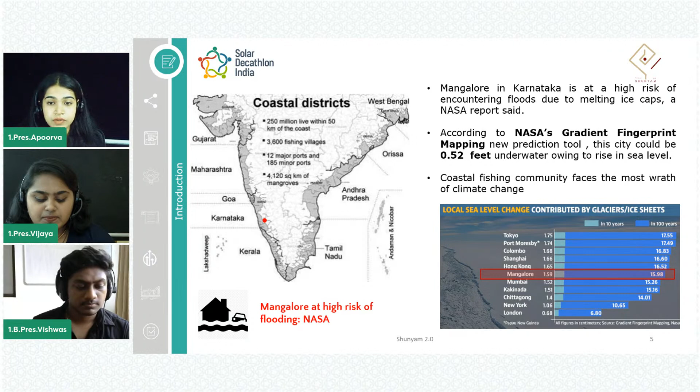Most of India forms a peninsula, which means it is surrounded by water on three sides. Peninsular India comprises the diverse topological and climatic patterns of South India. The peninsula is bounded on the west by the Arabian Sea, on the east by the Bay of Bengal, and on the north by the Vindhya and Satpura ranges. But these coastal cities are endangered owing to climate change. This is further supported by the latest report from NASA, which predicts that cities like Mangalore could be half a feet underwater owing to rise in sea level. The Mogaviras, a fishing community especially, is affected dramatically. Mangalore is a bordering city to Kerala and is prone to flooding very often.

Many flooded houses along the stretch are deserted. People living in this area are now seen often relocating during monsoon season to avoid harsh effects of climate change. As per IPCC reports, the coastal city of Mangalore is expected to face impacts of climate change and rising sea level. Given the challenges, we have considered our site on the coast of Ullal.

The site is home to the indigenous Mogavira community, easily accessible to the public, and has very viable problems which can be addressed by providing a community resilient shelter. Here are some hard numbers for your reference. Nerel is to be developed on 3 acres in the warm, humid climate of Ullal, Mangalore. Our project has a built-up area of 3,500 square meters and can house about 200 people.

The project will be occupied for 24 hours for 6 months, which is monsoon season, and for the remaining 6 months it is expected to be occupied for 12 hours including weekends. We have done an environmental vulnerability assessment for our project and have considered various threats to our site. From the assessment, it was very clear that we need to take utmost care from the sea, floods, and pandemic.

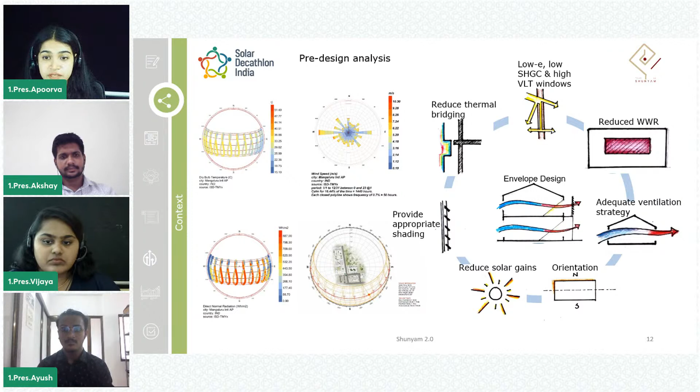So, based on the climatic analysis for the site, Nerel design principles include reduced thermal bridging with use of insulation in roof wall junctions, use of passive house windows, reduced WWR with adequate ventilation strategies, and reduced solar heat gains by appropriate shading strategies and orienting the longer axis of the building facing north south direction while providing appropriate shading. Nerel also follows an integrated design approach to achieve net zero energy.

We considered having a lot of to and fro to reach a consensus in our design. We have defined 8 broad goals for our project, apart from the 10 contests as suggested in the competition brief. The way we have defined these goals is to have a strategy along with the rationale. For example, we have a target EPI of 50 kilowatt hours per meter square per annum for our project, for which the strategy is to reduce the cooling demand by reducing the radiative, conductive, convective heat gain for our building envelope.

Further, the rationale we have is that cooling load accounts for 60% of the overall energy consumption in the building, and addressing the high energy consuming parameter will help to reduce the overall building EPI. To achieve the said goals, Nerel uses specifications like orienting the longer axis facing north and south, providing 30% WWR along with the use of double glazed windows to reduce heat gain. This is further enhanced by having overhangs, roof, and wall insulation.

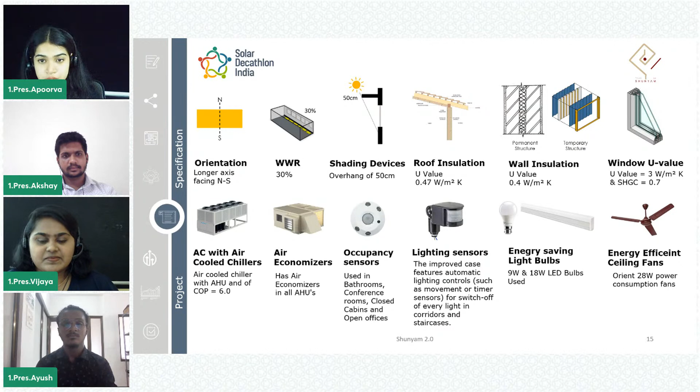Further, to increase energy performance, fixtures like energy efficient fans and light bulbs, and occupancy sensors are used. Indoor air quality is maintained with ACs with air cooled chillers and air handling units. Each air handling unit is equipped with air economizers. Considering the usage of spaces in a community resilient shelter, Nerel has permanent and dynamic temporary zones in the building.

The community kitchen and the dining, dormitory, and school daycare are designed to be temporary structures, while the hospital, the isolation blocks, along with the market and administrative office, are designed as permanent structures through the year, benefiting the entire community. The plan of the CRS is oriented with respect to the climatic analysis.

The site lies partly in CRZ 1 and CRZ 2. To tackle this, the built forms in CRZ 1 are of temporary nature, while the built forms in CRZ 2 are of permanent nature. The plan is kept very simple with access along the site.

The site consists of a market space, office, health cum isolation center, school cum daycare center, dormitory, and a community dining and kitchen. The access to the site is without any barriers and facilitates free movement. The CRZ2 parts of the site consist of a health center, isolation wards, market space, and the office, which will remain functional even during the non-disaster times, while the CRZ1 will be functional when required during the peak periods or during any disasters.

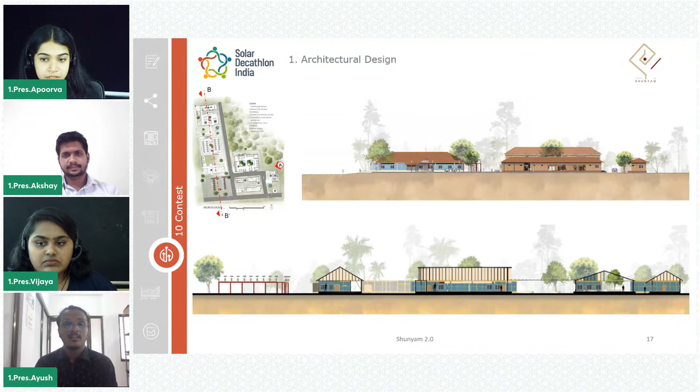The space making in the site has adopted many contextual elements such as cuttays, which are basically talking spaces around a tree designed to facilitate communication and a source of relaxation for the people living there. The temporary structures' walls are an assembly of steel frameworks with insulated JSW corrugated sheets. Since the CRZ1 has loose soil, the foundation was designed to fulfill certain requirements. For this, an innovative idea of using well rings to support the foundation in order to allow the soil to be compacted in place was implemented.

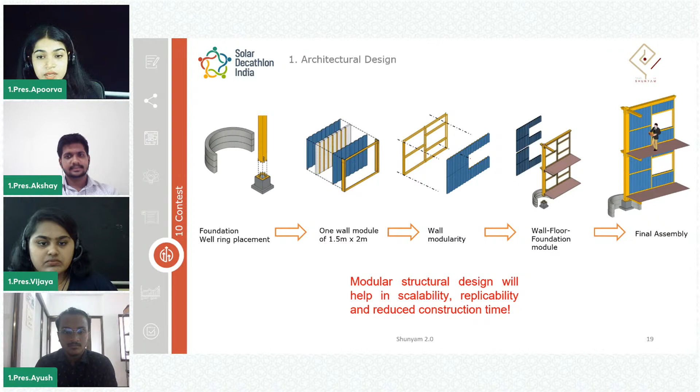On doing several analyses, we came to a conclusion of filling the rings with different layers of aggregates in order to attain structural stability. The assembly is then bolted, erecting the columns and roof in place, and the wall modules could then be fixed by arranging the assembly in not more than 60 hours during the time of any disaster or pandemic. The roof assembly was designed to counter the strong winds and cyclones during the monsoon season. This assembly also helps to prevent the upliftment of the roof from the main structure.

To achieve this, the roof behaves differently in two different cases. That is, case A, when there is not much wind, the flaps will be closed and the water will be directed to gutter A, which is at the lowmost level. While case B is when there is much wind, the flaps will open to let strong winds pass, thus keeping the structure intact while the rainwater will be directed to gutter B, that is the uppermost gutter.

Now coming to the energy performance, Nerel has been able to achieve 67% reduction in EPI as compared to the base case. This is possible by using various energy conservation measures like proper orientation, reduced window to wall ratio, window shading, wall and roof insulation, better window U value and SHGC, efficient HVAC, various sensors, energy efficient lighting, and ceiling fans.

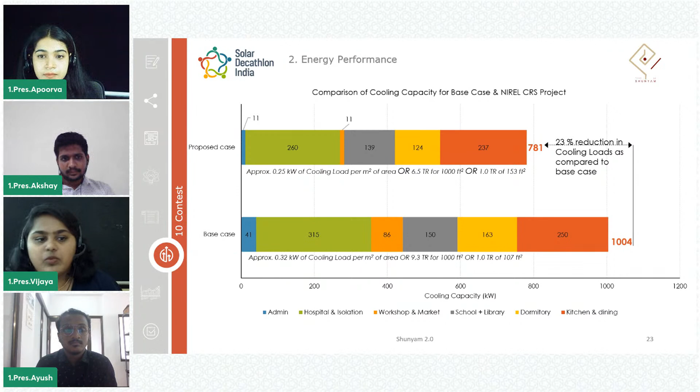While 67% EPI reduction is seen with set strategies and energy efficient solutions, NIREL is further able to reduce 4% EPI with the use of solar panels and an additional 1% reduction using pavement tiles, bringing the overall EPI reduction to 72% as compared to the base case. Research and published data shows that in Mangalore, groundwater has gone 30 to 40 meters below ground. This brings us to our contest number 3, which deals with water performance.

We have deployed various water saving measures like low flow flush, waterless urinals, other efficient plumbing fixtures, rainwater harvesting, using root zone treatment methods, grey water and black water treatment plants, and having an open well. This helps us in 42% reduction in water demands and 100% water demands being met on site.

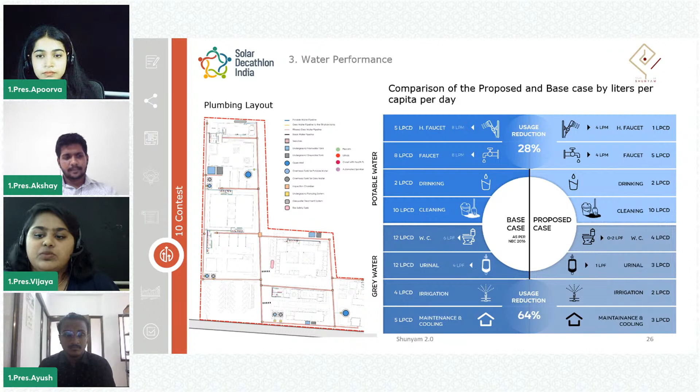Furthermore, the pipelines of water supply pass through trenches all along the site. As water saving measures in Nerel, we use low flush toilets and aerators to regulate water flow. Hence, usage of potable water is reduced by 28% and usage of grey water reduced by 64%. Furthermore, we also have been able to meet the water requirements as per NBC.

Furthermore, Karnataka is experiencing increasing temperature and heat waves year after year. In 2021, parts of Karnataka experienced a peak rise in temperature. Thermal comfort becomes a challenge in design. High performance, net zero buildings would not only minimize energy use but also provide low cost thermal comfort solutions to communities in rural areas. As per the results from Design Builder, we have been able to meet the monthly zone thermal comfort as per ASHRAE 55 simple model for our NIREL CRS project.

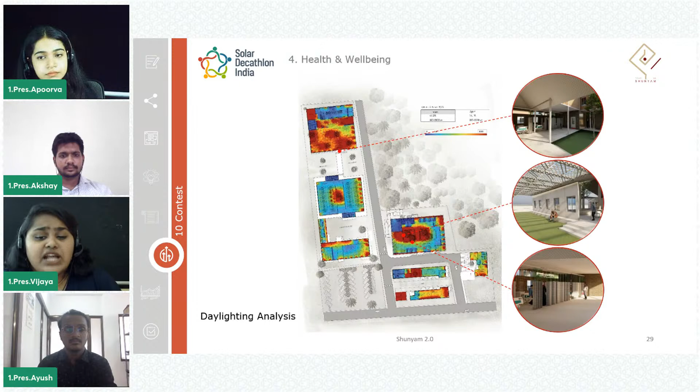Nerel uses a supervisory control and data acquisition system, an integrated system to keep a real-time check on how much energy is consumed on a daily basis, and whenever there is a problem such as leakage or excess use of energy, this system can control and restrict it. This in Mangalore is already implemented in smaller residential units and MESCOM will integrate this on an industrial scale within a year. SCADA has helped us improve the efficiency of the system.

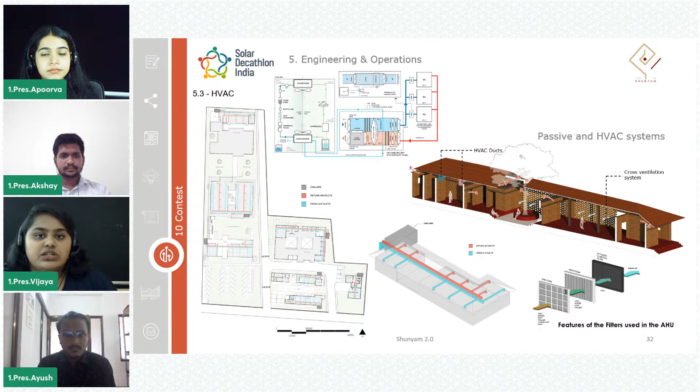Communities in Ullal are highly vulnerable to natural disasters. In that case, the buildings become the first defense for communities. Disaster resilient infrastructure is paramount to protect them from risks to their lives and properties. Food being the important source for survival in any disaster, the site itself will be self sustained enough to meet the food demands of the residents on a small scale with the implementation of square foot gardening.

Along with solar panels, energy generating pavement tiles become a source of renewable energy in Nerel, powered by footsteps. This has successfully helped us reduce our EPI by 1%. Mangalore, being in a warm and humid climate zone, has an average annual relative humidity of about 76%. In Nerel, this has been put to use for generating potable water using atmospheric water generators. Additionally, with the site falling near seashores, it is easier to desalinate salt water with DIY desalination processes.

Now, coming to the most important part, money. We have done our cost calculations and we have been able to achieve our project Nerel at 14% incremental cost as compared to our business as usual case. We also calculated our return on investment, which is at 14.5% and is almost twice the interest rates offered by banks today. We understand that Nerel has 14% higher cost and is difficult to be accepted in a socio-economic setting such as CRS for the Mogavera community.

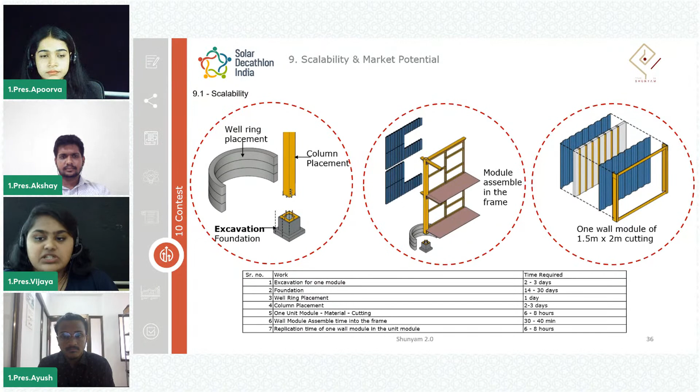The wall and foundation modules being made with ready to use materials makes it significantly easier to replicate the assembly, which contributes to lesser construction time, further increasing the affordability of the project. This also means Nerel can be executed anywhere along the coastline with corresponding conditions. Data shows that about 250 million people live within 50 kilometers of the coast with 3,288 fishing villages, while there is a significant rise in fishing activities in India.

With NIREL's increased scalable aspects, the project can be a solution to keep these numbers up. So, all in all, through our interventions for the NIREL CRS community in the warm and humid climate of Mangalore, we have been able to achieve an EPI of 520, which is a 72% reduction as compared to the base case. We also achieved 100% thermal comfort needs while reducing cooling loads by 23% at the same time. We have 100% water demands met using rainwater harvesting while reducing 42% water consumption.

And we have gone as far as to tell you that we have 66% reduction in embodied carbon energy and 44% reduction in operational carbon energy. Now, you might be thinking that since NIREL has such an amazing design and a reduction in energy and water, it must be costing a bomb. But let me tell you that NIREL is costing only 38,489 rupees per meter square. This is 14% higher cost as compared to the business as usual case.

We justify this cost by having an annual return on investment of 14.5% and the ability to affect about 1,000 people of the Mogavera community. In this section, we would like to bring to everyone's notice that everyone knows the term sustainability. We are also aware of the challenges that we face in achieving sustainability in the built environment. We also know that having sustainability in the built fabric will lead to benefits like high work productivity, better living conditions, improved longevity, and the list goes on.

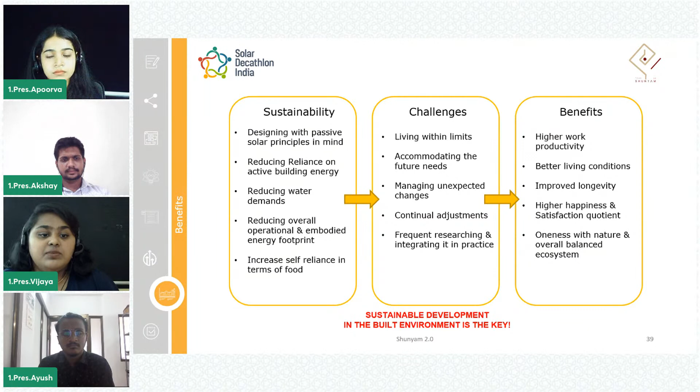Then what is it that is stopping us? We think the answer is lack of realization, as the mask of deception falls off the face of humanity, unveiling the grim realities of human actions in which everyone will be a casualty and no one will be exempt. Yes, although we are many, we are also one. And so, in the final analysis, we can win this war. And as we are toward the end, but the end is only the beginning of calm before the storm. Remember, the choice is solely ours and yours to choose ecosystem over egosystem. We thank you for the opportunity to present our Niral journey.

Ma'am, you're on mute. Thank you, team. You finished well in time. So let's hear the jury comments and take questions from them. Aalok, I'll start with you. You can ask your questions.

Yeah, so thanks, Nivedita, and congratulations, Apoorva, Akshay, Ayush, and Vijaya on making it to the finals. Thank you, sir. I enjoyed reading your report, and I think you have quite a few good things going in your project. One thing that I was not clear about, and I was hoping to see that clarity in the presentation, is: are you hitting a net zero energy target? From the presentation I could gather that you are water neutral, but it is not clear whether you are hitting a net zero energy target. So if you could just help me understand that, it would be helpful.

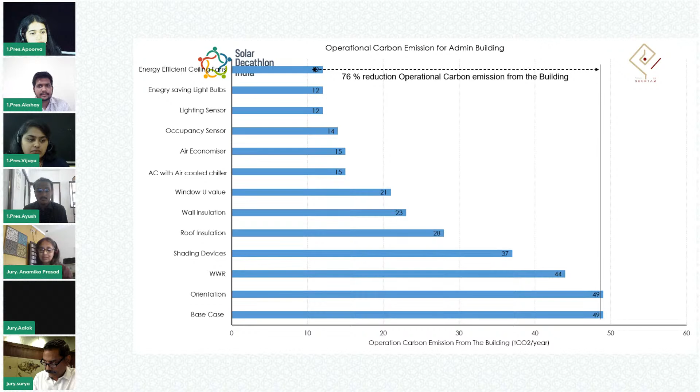You've put in a lot of effort into designing some of your structural systems, and your thought process is well articulated. The well ring foundation, the adaptable flaps on the roof, the modular metal walls. So great job on working that out very well. What else? I was also very happy to see you mention the SCADA system and talk about grid integration. So that is a big plus. Yeah, good job.

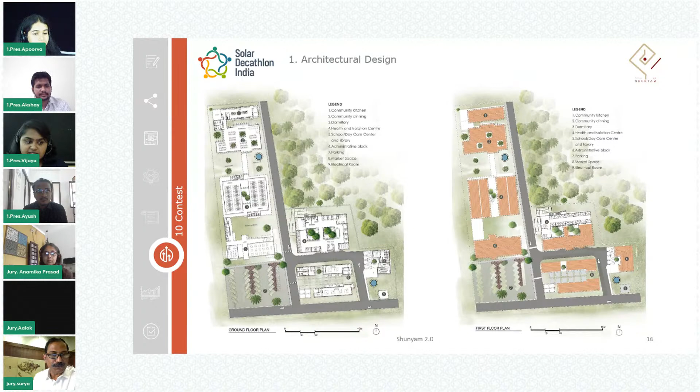If we have a minute more, I just wanted to understand. So if you're spending 38 crores and getting a return on investment of about 14 or 15%, it means that the community center is making 5 crores a year. Is that what your calculation suggests? 38,000 per, it is per square meter per annum. Yeah. Okay.

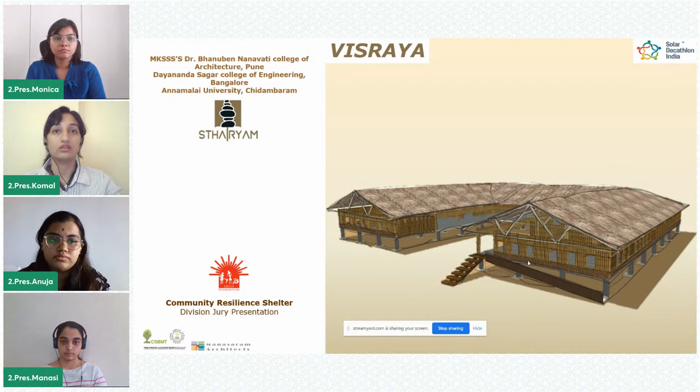Team Sthairyam introduces you to Visraya, meaning shelter for protection. In our case, a community resilient shelter designed for the Mishing community in Lakhimpur district of Assam. To design this, Team Sthairyam comes together, which consists of 12 participants from masters and bachelors. With this diversity in curriculum, our team tries to look at the competition's requirements through various lenses with our faculty lead, Prajakta Kulkarni ma'am.

Our site lies in the northeast part of India. Floods wreak havoc in Assam every year during monsoons. Assam is the land of two mighty rivers, the Brahmaputra and Barak. Each year, these two rivers cause floods in vast areas of Assam. In Lakhimpur, there are around 180 villages, and they all fall under flood-prone area. The nature of the area has rendered the communities disconnected and has left them with limited alternative income sources.

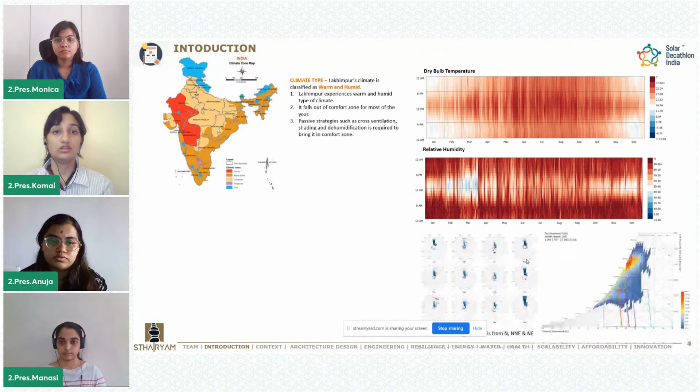Lakhimpur experiences a warm, humid type of climate. According to the chart, it falls out of the comfort zone for most of the year. Dehumidification is required to bring it into the comfort zone. Our site is located on the warm plains with high levels of humidity and heavy rainfall. This brings in water from hills to plains with debris and erodes the soil.

To overcome these challenges, we aim to provide sustainable design to optimize the use of water and energy, make it a resilient and adaptable structure for alternative uses during non-disasters as well, to achieve comfort using efficient solutions, effective reduction in operational and capital costs of the building, to make space safe for women and kids, and provide hygiene and health.

As a team, we intend to follow an integrated design approach, whereby we have set goals for our project in line with our project partner's ideas. The process started with disaster risks in India and management by the state, followed by the site-specific study on the disasters and climate. We then studied local methods and building materials, their stability to withstand disasters in past years, and their architectural styles. After a brief study of the villages, some of the immediate impacts of the flood mapped are on transport, availability of resources, food, sanitation, and shelter.

A preliminary base case analysis with daylight, energy, and ventilation was done for the design options. Comparing the parameters, this design was the feasible one to go ahead with. Project Visraya is designed flexible enough to be used during non-disasters. The site area is 9,500 square meters with a built-up area of 1,810 square meters. The site is flat with an access road on the northern side. The wind flow and the water flow in the site will be prominently from the northeastern direction. Selecting the site location above the main river has helped us reduce the direct water flow in the site.

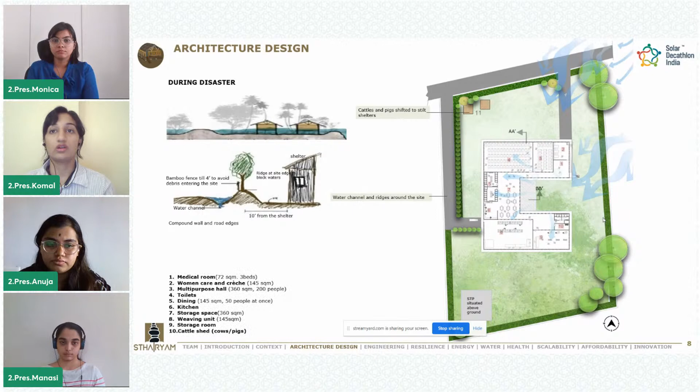So the core guiding principle in our design was to reduce mechanical energy and use natural ventilation while keeping the occupants in a thermally comfortable and safe environment. The shelter is designed to be flexible to accommodate 200 people, and other spaces are converted according to their needs. The cattle are shifted to the stilt shelters. The periphery of the site is designed with water channels and ridges around the site. The STP is located above ground at the southern end of the site to avoid water contamination.

Management during disasters. Preparation for the disaster scenario includes early warnings, providing first aid to the injured and rescued, 24-hour medical rooms to take care of children, women, and disabled, SHG spaces converted to a women's room, preparing medical units during disasters and post disasters, and stocking community kitchens with supplies, moving equipment and baggage to the logistics and weaving room, while laying the mattresses in the multipurpose hall, clearing out spaces for additional occupancy, and lastly, moving the cattle to the shelter.

Here, a building is elevated on concrete stilts to avoid water inflow and enhance greater air movement. Woven bamboo mats made by communities are used in the partition walls. Louvers in the central courtyard provide continual airflow in the humid climate.

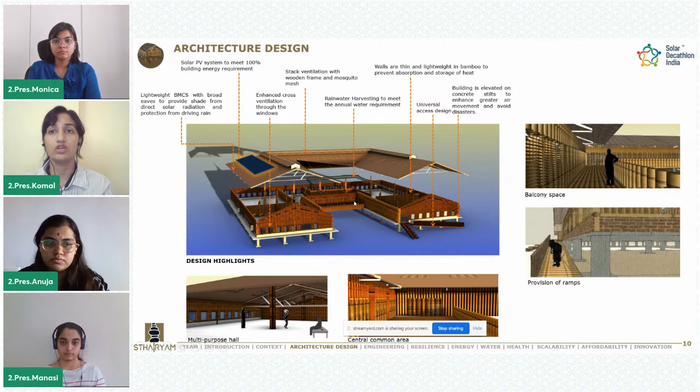Engineering and operations. The material palette includes stone foundation; the substructure is in concrete columns and flooring. Bambusa balcooa can be used for the load-bearing structure, such as walls, partitions, and columns. Simple methods of treating and seasoning bamboo used locally, like water and smoke treatment, are carried out prior to placement, and it is further treated with CCB to reduce the effects of decay and insect infestations. This increases the lifespan of bamboo by up to 20 to 25 years.

Bamboo and cane exterior walls are plastered with mud or cement with fine river sand. The outer edge of the structure is constructed with a hollow adobe block embedded with bamboo columns till sill level, and above sill level it is a bamboo and cane wattle and daub. Interior partitions will be locally available ikra reed panels or bamboo woven mats made by the communities.

The roof consists of wooden trusses, rafters, and purlins of bamboo, with a bamboo corrugated sheet covering with large overhangs. The truss takes up most of the load. The structure is analyzed based on STAAD Pro analysis, and based on the performance of the structure, detailing is taken forward. The depth of the overhang is further calculated using solar azimuth and altitude angles. Using the vertical shading angle, we got up to 1.3 meter depth of the overhang.

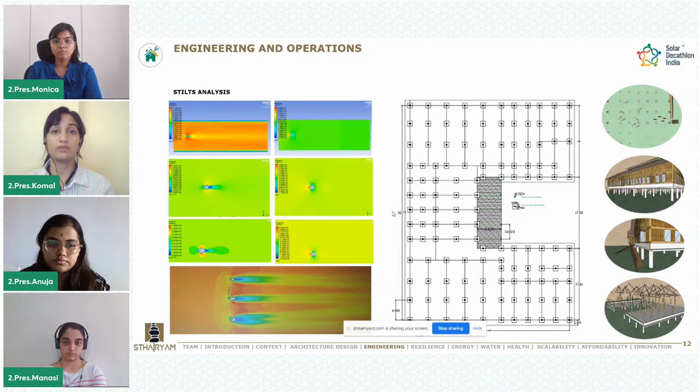Over to you, Monica. Yes, the shelter is connected to the communities within 1000 to 1600 meter radii, providing sufficient supply of goods required for the rescue. Then use of local materials in the construction of the shelter and understanding the local labor. Then creating resilience in nature by creating ridges to prevent damage from debris and the harsh flow of flooding water. Elevating the structure to be resilient during water inflow, relying completely on solar power backups as the shelter is going to be off grid.

So the rain screen detailed windows can withstand the wind, and interior finish materials can dry out and not require replacement. The windows are protected by mosquito mesh, chicken mesh, bamboo grills, window shutters, and large overhangs to protect from the rainwater. Since we have heavy rainfall of about 3,500 annually, the louvers have been designed to keep the water out and allow continual airflow to provide comfort along with the ceiling fan. So the louvers reduce the air velocity by between 25 to 50%.

Resilient metrics. The passive performance of the shelter is 5,745 hours of thermal comfort, that is, 66% of the year it is thermally comfortable. Energy storage: 40 solar batteries with storage capacities of 2 days each are provided. Then for medical support, allocation of medical and paramedical staff as per the FLEWS. Then communication pre and during disasters: the equipment is checked monthly, and maintenance of all equipment is according to the manual. Water sufficiency: drinking water and water use is for a 2-day period.

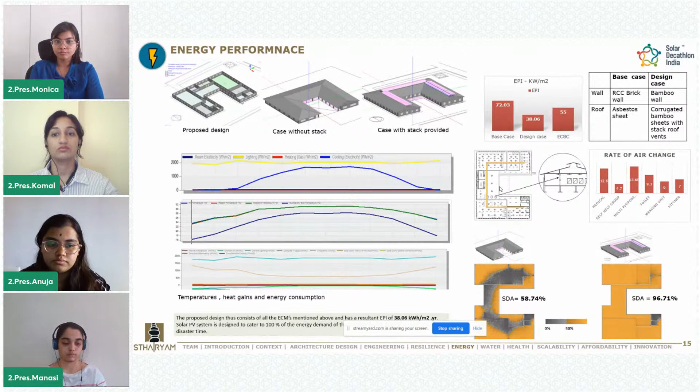Then coming to the solar PV system, the solar system design was optimized by the provision of on-site renewable energy sources, making it completely off-grid, living autonomously without the reliance on the public utility for power. So indicative solar design for the community shelter cum agro-processing center and dairy unit was given by Selco.

The solar design provided a hybrid model and will be connected to the grid for battery charging during non-availability of solar. The batteries and the inverters have to be placed in a well-ventilated space away from any water spillage. Only one machine will be used at a time, so both the machines will not be running simultaneously, and the batteries can be placed in the logistic or the packaging unit. Efficient lighting fixtures are used to reduce the lighting load.

Solar energy products like the rice huller, the solar water pump, and the solar lighting systems are used. Integrated energy centers are installed by Selco, which are essentially solar powered independent service centers in the rural spaces where a combination of energy services such as lighting, mobile charging, charging batteries, etc., can be provided on daily or monthly basis. Over to you, Manasi.

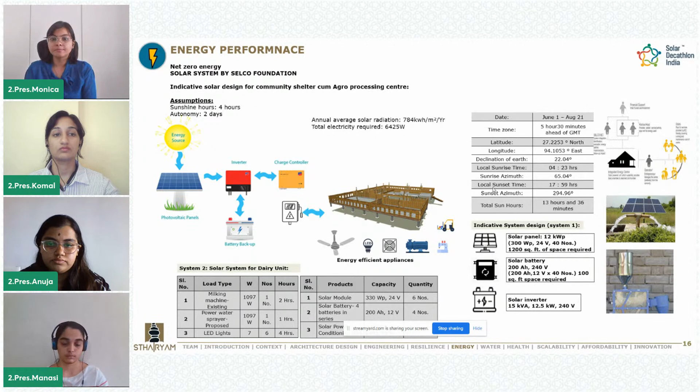We plan to design a net zero water structure. The site has no access to the municipal supply, but as there is abundance of rainwater, we plan to use harvested rainwater and treated water to suffice our water demands. Water is collected from roof surfaces. First process of screening is done at the rain gutter.

It is next filtered through the slow sand filters as they require little or no mechanical power, chemicals, or replaceable parts, and they require minimal operator training and only periodic maintenance, which makes it more appropriate and affordable for our site. The filtered water is then stored in the underground water tank. The extra water will overflow from the tank into the borewell. The water from the tank will then be used for washing, cleaning, and other purposes. For drinking, the water is further purified using bamboo charcoal filter.

The grey and black water generated is sent to the sewage treatment plant of capacity 19 cubic meters to be reused for flushing and cleaning. As the area is prone to severe floods, we decided to use packaged STP for the site, which will be partly above ground. That is, the 7 feet tank will be 4 feet above ground so that the flood water will not touch the lid. Packaged sewage treatment plant is an innovative and truly versatile system for the effective treatment of wastewater.

As per NBC, the water consumption in liters per day per person was 135, but with the use of low water fixtures and using Indian commodes, we have reduced it to 95 LPCD, that is 30% less than the baseline consumption. The annual water consumption is 3360881 liters, which is sufficed by using harvested 3442909 liters of rainwater and 156531 liters of recycled water, which shows that we have achieved net zero water sufficiency. The extra rainwater collected is then used to recharge groundwater.

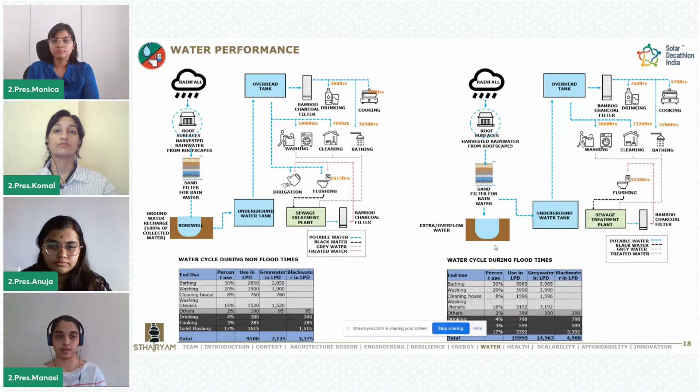Health and well-being, waste management. Sandbags are used to prevent flood water from entering homes and other buildings. By blocking the water flow, the sand in them and the bag itself can become contaminated with chemicals, pathogens, human and animal sewage from the flood water. No reuse of sandbags in areas where people may come in contact with them.

For women during non-disaster times, there is an SHG and creche for working women. The same SHG and creche can be used as a women's room for kids feeding and a special care room during disasters. A pure water tank for drinking purposes is provided. Multi-purpose SHG and creche spaces and 3 beds for medical emergency.

Cows and pigs rest during non-disaster times or in summer under the structure at stilt level, and during the monsoons or disasters they are shifted to the shelters provided above the ground. The provision is made for cows and pigs separately to avoid diseases and ease maintenance.

During the disaster period, 64% of thermal comfort hours are achieved while designing with respect to passive strategies using cross ventilation and stack to dehumidify the space. The comfort hours achieved for the proposed case are 5,745 hours, that is 66% for a year. CFD analysis on ventilation gives an indoor ventilation velocity of 1.8 to 3.77 meters per second.

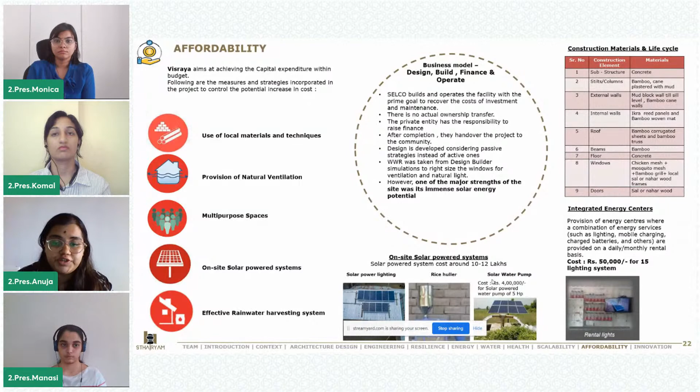Next, innovation. About 70% of India's total population lives in rural areas. More than a third of the water available to them is undrinkable. Several states have reported multiple contamination of drinking water, and there is no doubt that the current water situation in India will get much, much worse unless proper solutions are found.

What makes this water filter unique is the use of bamboo charcoal, which is a locally abundant product and a nature-based solution. During water purification, bamboo charcoal even dissolves its rich mineral content into the water, so the purified water becomes mineral rich. Besides bamboo, they also suggest the use of gravel and pebbles in various stages to aid in particle settling and hence further purification. The process is indigenous, environment friendly, inexpensive, and requires minimal maintenance. It can purify 30 liters of water per hour using a batch process under maximum sun exposure.

The solar bottle bulb serves impoverished populations living without electricity. Water is first cleaned by a basic screening process and UV filtration. Bottles are filled with filtered water and an alkaline substance. This water refracts sunlight during the daylight and creates the same intensity as a 55-watt light bulb, making daylight affordable and easy. This saves electricity and provides a way of lighting for those who cannot afford it while keeping homes secure.

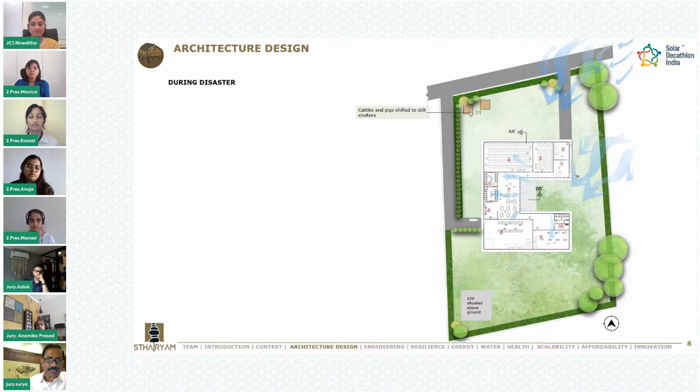These are all small things which can further refine your project. It's not that this is a big problem. There are so many other things that you've really thought through well. So I'm quite happy with what you've shown, and wish you all the best.

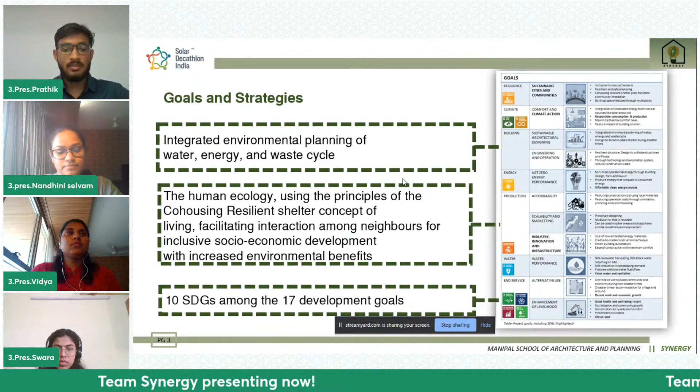We were successful in achieving 10 of the 17 Sustainable Development Goals. While formulating our goals and strategies, we kept in mind integrated environmental planning using the water, energy, and waste cycle, and the principles of co-housing and resilient shelter, and aimed for an interactive community along with socio-economic development ideas. Next slide.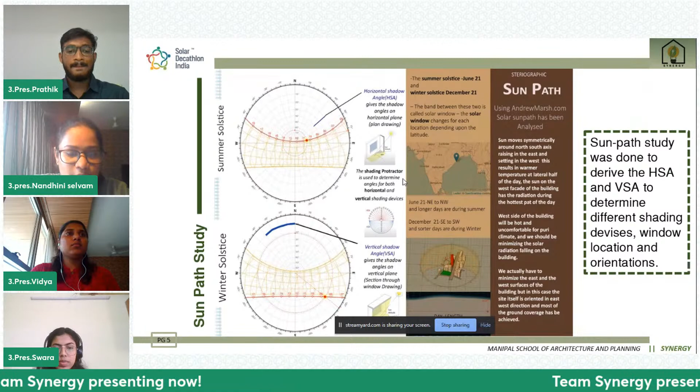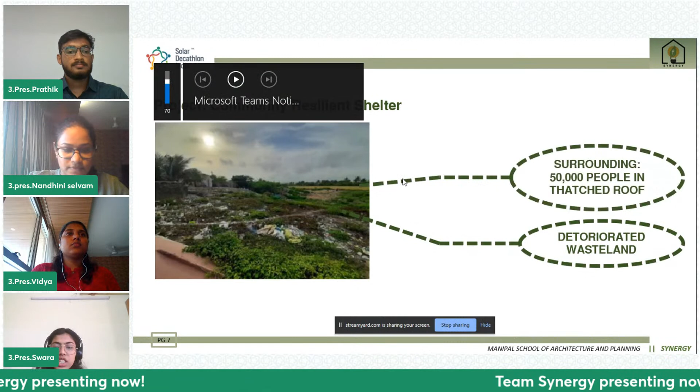Our site is a cyclone prone area, and weather conditions here make the need for a resilient shelter inevitable. It's surrounded by 50,000 people living under thatched roofs, and currently the site has become a wasteland surrounded by crowded slums, which would be converted into a community resilient shelter accommodating around 200 people. Next slide.

Our project name is Ahana, a community resilient shelter. Our main goal is to build a resilient shelter for community benefit, which goes along with net zero energy and water. As we enter the site, the building has a stilt floor, which is connected to three floors above. The first floor has common amenities. The second and third have multipurpose halls and dormitories. Next slide.

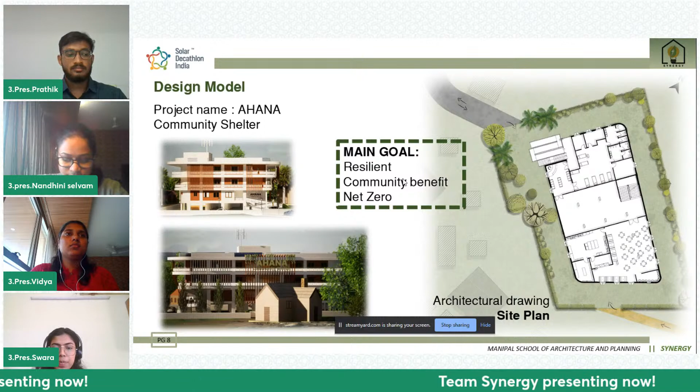This is a walkthrough of our design, showing the stilt floor with the respective floors above it. We have provided the stilt to avoid flooding on the ground floor during floods. The facade details with material representation and the overhang of the building are visible.

The first floor. The entrance of the building is via a ramp and a staircase above the stilt level leading up to a common corridor. It accesses the admin and then pharmacy, but that remains as such during non-disaster times. The reception has a seating area and accesses the medical area as well as a common space.

The common space will be used as a multi-purpose hall during the non-disaster times, and during the post-disaster time as well. It's used as a healthcare or food distribution center connecting to the dining area and community kitchen. All the spaces in this floor layout continue the same function during the non-disaster time except the multipurpose hall during the post-disaster time. The second floor and the third floor consist of two dormitories.

The second floor dormitories are for the women and children and the above are for the men. So these are connected by a common multipurpose hall that doubles as a dormitory if needed. The dormitory above the medical area is being converted into isolation space in case of pandemic. So during the pre-disaster time, the dormitory could be used as a women workshop and Anganwadi as well. The next slide.

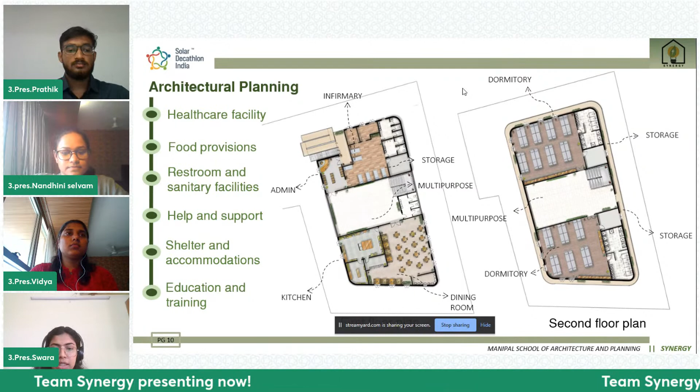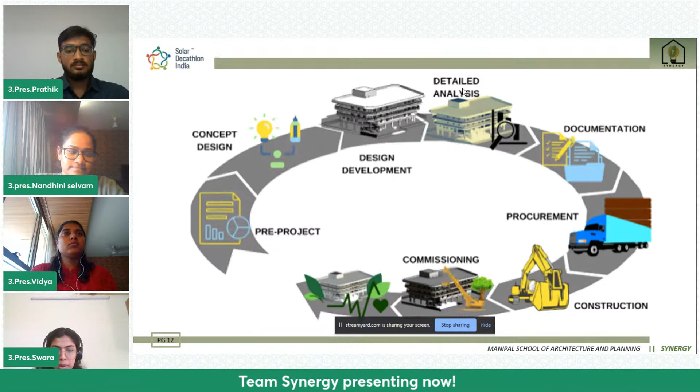We have done site analysis, SWOT analysis, and climatic analysis for the pre-project. Then coming on to the concept design, where here we evaluated different options. And then design development comes. So here developing the design and creating the idea of the structure comes in place. Then detailed analysis for the shading elements, facade, and specification are done.

Documentation, where the whole process of analysis is documented. And then helping the client and design team for procurement. During the construction, we need to make sure that all the practices are followed properly. Commissioning the energy systems is very important. So if we have designed the best building, but not commissioned it properly, we will lose the efficiency. And then the net zero building is developed at the end. Next.

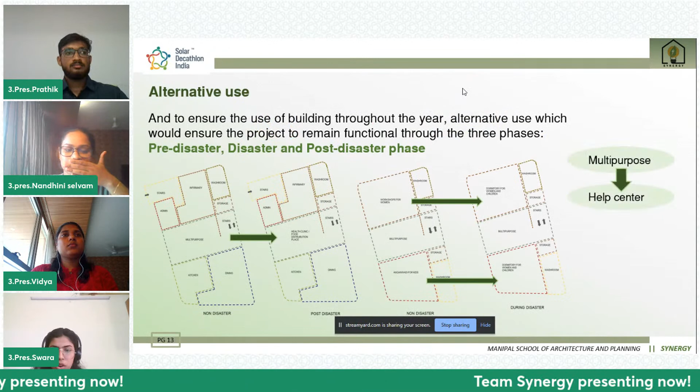Our project will function in three stages. The normal, that's a non-disaster period, the pre-disaster, and then the post-disaster periods. The pre-disaster time, there will be workshops like Anganwadis and workshops for the women, which will be converted into occupant shelter and then dormitories during the disaster time. Post-disaster time, the main function of the project is to provide help and support to overcome the disaster loss. Next slide.

Coming to the innovation part, our team's prominent innovation is CSEB block with pyramid hip projection. It is used on the outer facade of the building. The hip projection helps in self-shading, which reduces the heat gain inside the building throughout the year. 50% of each block will be shaded all the time throughout the day.

Other than that, the available ground coverage of our site, including the setbacks of 6 meters on all sides, was minimal. So we have maximized the FAR by extending the floor area on the second and third floors on all sides, which not only increases the usage space for the community, but also acts as a self-shading element for the below floors. Next slide.

The proposed construction budget for the project from the project partner was 32,000 rupees per square meter. This was excluding the operational costs, landscape, and internal works. They also allowed us to be flexible with the cost as it's a building that would withstand disasters like floods and cyclones. So finally, our proposed cost came around 72,000 rupees per square meter.

This was including the landscape, interior works, and everything. Though the capex is high, the opex will be less, and the internal rate of return is expected to come around 15%.

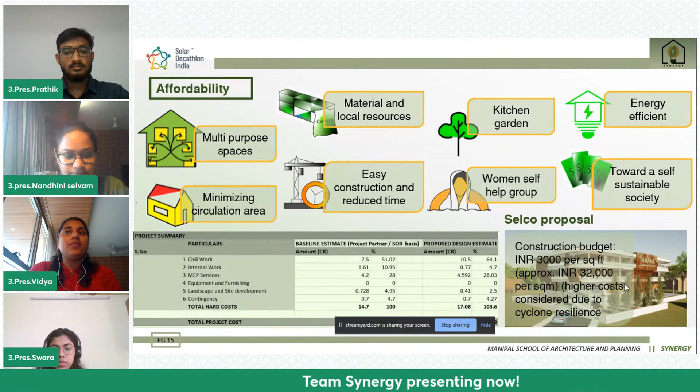The kitchen gardens provided in the setbacks help the community grow their own food during non-pandemic times that can be stored for pandemic times. The women's self help group during non-pandemic times can earn for their own livelihood, which would help them move towards a self sustainable society. Next slide.

As for health and well being, the fishermen are exposed to the local climate throughout the year and they are used to it. As the building is also located in the community itself, we have maximized the natural ventilation inside the building to provide thermal comfort. We have considered mechanical ventilation only for worst cases when thermal comfort is not achieved.

The temperature goes high during the summers, which is during the non-disaster times when the usage of the building is minimal. Whereas during the disaster times, the thermal comfort and the air quality inside the building is not sacrificed. Next slide.

Our project Ahana is designed to achieve an EPI of 53.25 kilowatt hour per year with optimal comfort and targets to achieve net zero energy and water performance. It is designed to withstand cyclones and floods with its structural and functional durability, and we have worked on health and well-being by ensuring indoor air quality with thermal comfort. Next slide.

Coming to the resilience part, we have noted down the following problems and strategies. The first problem is the damage of lightweight roofs due to high wind speeds. The strategy we came up with was that the roof pitch is to be kept at an angle of no less than 22 degrees. The second problem was the failure of walls due to extreme wind force. So the strategy is use of reinforced concrete bands at different levels, which will help to reduce wall failures during strong wind force and earthquakes.

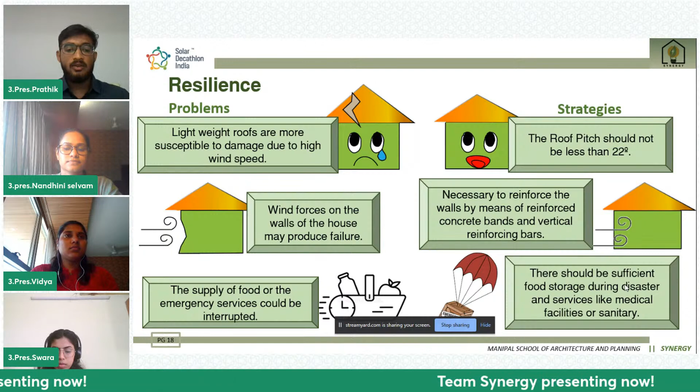The third problem was interruption in the supply of food during the disaster, and the strategy is the setback area can be utilized as cultivable area for food and medicinal crops, which can be used during the disaster time as a backup for short duration. Next slide.

So one of the other most challenging parts was that we had to design the renewable energy generation for the entire building. Considering the climatic condition of Puri, Pentakota, the maximum hours of sunshine throughout the year will help us with efficient solar panels for energy that can be accumulated and used. And Pentakota is also exposed to hurricanes and heavy monsoon rains, during which the amount of solar energy can be reduced to 30%.

At such times, the wind turbines can be used. And the type of wind turbine that has been used is H type, which is made of glass fiber, which is less in weight, more durable and also cost efficient.

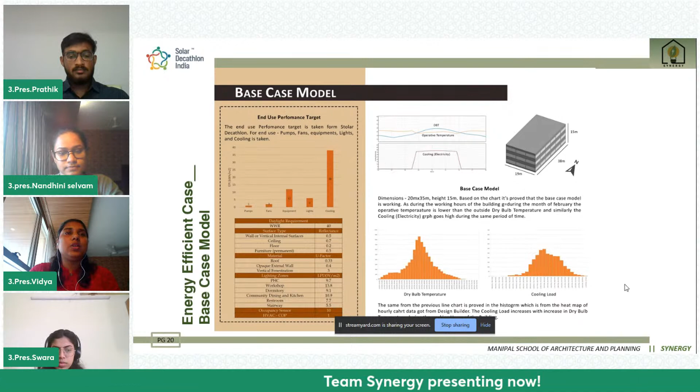So, to reduce the energy consumption of the building, we came up with energy conservation measures that will help us to increase the energy efficiency of the building and make it a high performance building. For that, we came up with 5 energy conservation measures. We worked on envelope, orientation, window to wall ratio, shading, and efficient lighting and HVAC with good LPD and EPD.

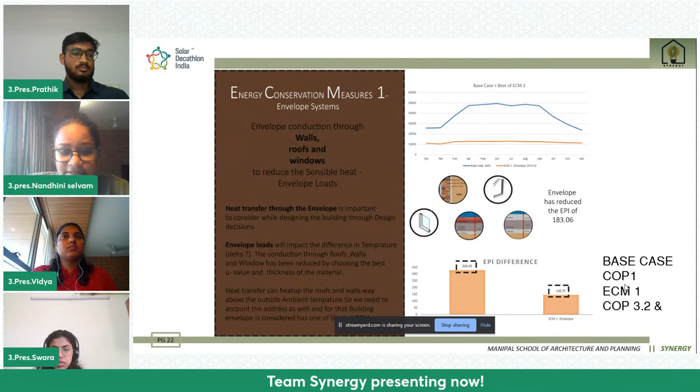So the first energy conservation measure we took was for the envelope, that is to reduce the sensible heat of the building, which impacts the difference in temperature, delta T. Considering this in the roofs, walls, and windows, the best U value and thickness of the material has been chosen. Here we can see from the base case to ECM1, the EPI reduction is 183.

That has helped us to reduce it with the help of the envelope, and also we have kept the coefficient of performance of the HVAC as 3.2. So we can see the EPI difference as 183 from the base case to ECM1.

So there are four cases that we have taken for the combination of walls. With walls, the best case that we have taken is the best strategy that we have also included, which is the pyramid hip projection on the outer facade, and the brick is made up of CSEB. And also we have the insulation between the outer and the inner wall, and the inner wall is plastered with 10 mm plaster. And the same way we worked on the wall, we have worked on the roof also, where we have kept the target as super ECBC. So that helped us to reduce the U value of the wall and the roof.

So same for the window, we have gone for four different cases like single glazing or double glazing. We didn't opt for triple glazing, as the cost investment is too high. And the best case that we have taken for the window is 6 mm glazing on both sides with an air gap inside. So this is the best case that we have taken.

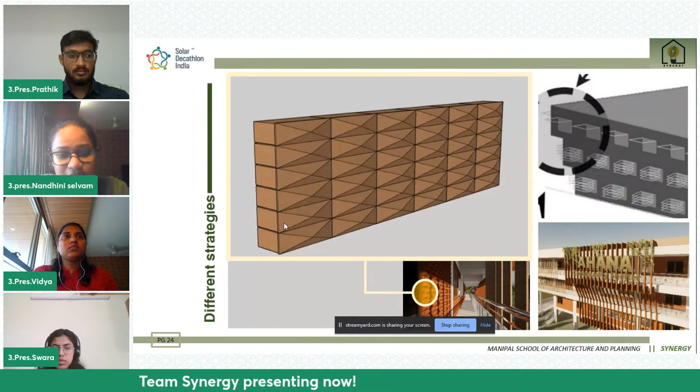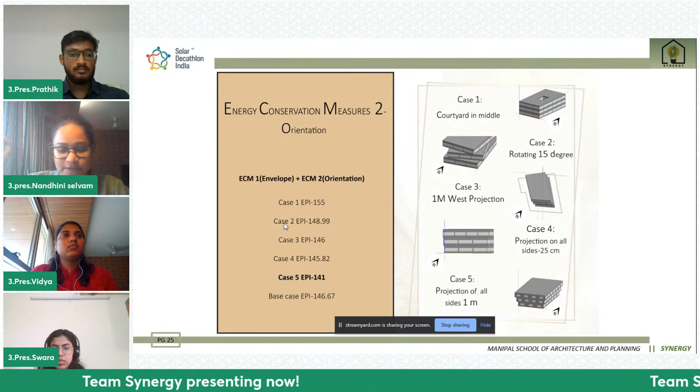For the second energy conservation measure, we have adopted both ECM1 and ECM2 aspects. For the orientation, we couldn't play much with the orientation because we have to achieve 100% ground coverage for the building. So we came up with the massing of the building, where for case one, we kept a courtyard in the middle, and the second case was rotating the building by 15 degrees. Case number 3 was projecting the building on the western facade as it has a lot of solar radiation. For the fourth case, we have taken the projection on all sides as 25 centimeters. And the fifth case, we have taken a projection of 1 meter on all facades.

So the best case that we got is projecting the building 1 meter outside for each floor. That helps us for the best orientation, and it has reduced the EPI as well. So the best EPI that we got was 141 including the projection of the building. This also helped us to increase the built-up area as well.

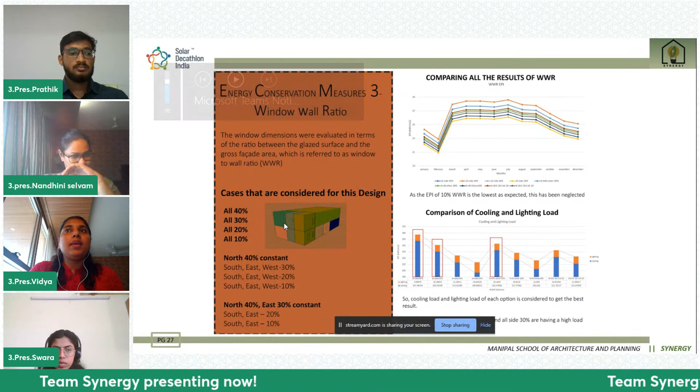We have considered WWR as our third ECM, as this would play a major part in the cooling and lighting load of the building. We have considered 9 cases in which on all sides we considered 40, 30, 20 and 10%, then with north 40% constant and changing the other sides to 30, 20 and 10%, and finally with north 40% and east 30% as constant and changing only the south and west. As per ECBC compliance, maximum WWR can go up to 40%, and hence we didn't go beyond that.

Considering only the EPI to find the best case felt absurd, as WWR with 10% came as the best case. Though the cooling load decreased, the lighting load increased. So we compared only the cooling and lighting load to come up with the best case, where we compared and eliminated the worst case step by step.

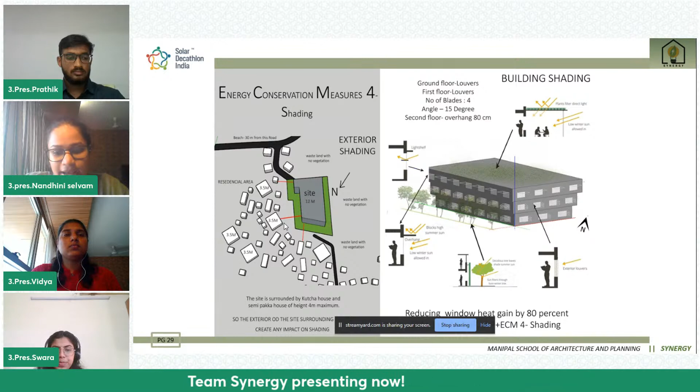For the east and western facade, we have planted mature trees that will help us during the summer as well as the winter. So here we can see how we have given the vertical shading and the horizontal shading, and also louvers on the ground and first floor.

And we can see the EPI reduction from the base case till ECM4. As for strategies, we have used 4-star rated HVAC systems and efficient lighting fixtures. We use the approach of mixed mode ventilation in the building, and we have also used self shading.

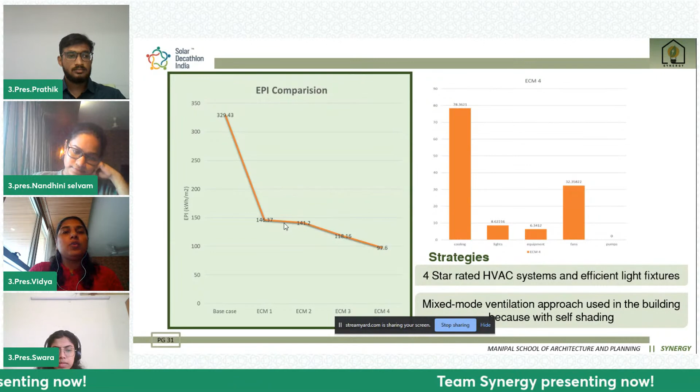Coming on to the water performance, it was one of our biggest concerns when it came to this project. Even though our annual rainfall is nearly 1,300 mm per year, our occupancy load for this building is slightly higher when compared to the building footprint. So, in spite of these challenges, we still achieved the net positive water cycle.

So, strategies which we have used for efficient water performance include, first, use of efficient fixtures, by which we have brought down the water demand from 135 LPCD to 90 LPCD. Second, recycling the on-site generated grey water to an efficiency of 75 percent, by which we have attained net zero water. Coming on to the water consumption, here we have considered around 200 people during the disaster time, and during non-disaster time we have considered around 100.

So the irrigation is taken down from 3 liters to 1.5 liters, which remains the same during both disaster and non-disaster times. The water sources: the rainwater is taken and filtered in a sand filter, which is then taken to a rainwater storage tank. Similarly, the municipal water is taken to the underground tank, which is then transferred to the OHT, that's the overhead tank, which is then distributed to all the respective users of the water.

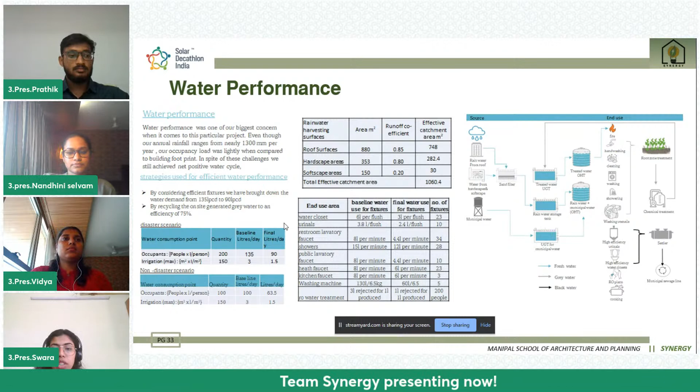So the water is then treated with the root zone and chemical treatment. The black water goes to the settler and then to the municipal sewage line. In this project we are only recycling grey water and not the black water. Next slide.

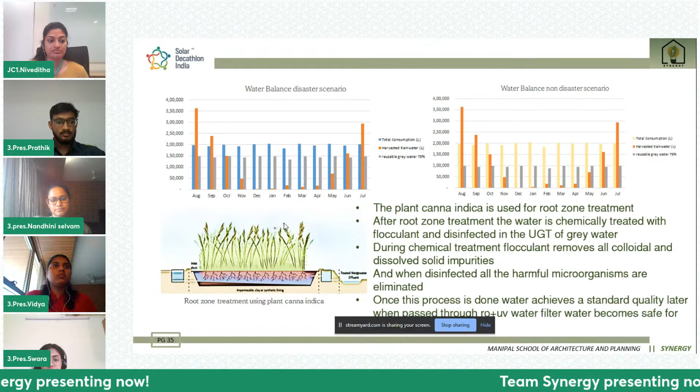The treatment process. So, as we spoke before, the majority of the filtration happens in the root zone treatment and not much in the chemical treatment. The plant Canna indica is used for the root zone treatment. After the root zone treatment, the water is chemically treated with flocculant and disinfected in the UGT of the grey water. In the chemical treatment, the flocculant removes all the colloidal and dissolved solid impurities, and the disinfectant helps in removing all the harmful microorganisms. Once this process is done, standard quality water can be achieved and later used.

Coming to the engineering part, the building consists of stilt, first and second floor. The concrete mix is designed for M25 grade of concrete for the structural elements. The maximum size of the reinforcement bars used is 20 and 16 dia bars, with 8 dia bars used for the stirrups at 150 center to center distance. There are 42 rectangular columns of dimension 0.3 into 0.75 meter each and beams of size 0.3 into 0.45 meter each, with a slab thickness of 150.

The foundation mainly consists of 38 rectangular footings, of which 3 are combined rectangular footings. The maximum size of the combined footing is 6.95 meters into 5, having a depth of 1.5 meters. For other footings, it is 1.9 meters into 2.85 meters with a depth of 0.6 meter.

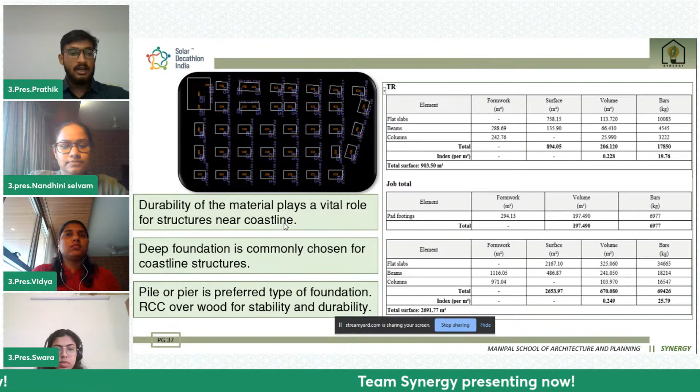The building is situated in zone 1 and 2 of the seismic zone, which is a low risk zone. So we can say that the building is structurally strong to withstand tsunami and cyclones, as we have the building 3 meters above the ground level, so the water won't enter the building envelope. The building edges are curved, which will help in diverting the winds away from the building. Next slide.

Based on the guidelines for design and construction of cyclone or tsunami shelters by the Ministry of Home Affairs, we discovered that the shelters need to be placed strategically in a grid-like format to ensure no one affected has to travel more than 2.5 kilometers to reach a shelter. And hence the site chosen is also inside the community itself.

Using this to create a grid based on the population, we can build multiple modules throughout the area. As the community population is around 50,000, the module we created is for 200 people, which will be replicated with minor changes in orientation. The lack of elevation can create problems concerning the guidance for MPCS, which have been tackled by providing columns and starting with the stilt floor. The structure is RCC framed, which can be reproduced in less time. Next slide.

As we know, sustainability is no longer an option but a norm. We also wanted to spread awareness through our Instagram page. We focus mainly on the young population in the age of 18 to 30. Our content has reached a wide population and is still increasing. We tried to involve the people with polls and gave them current updates with news.

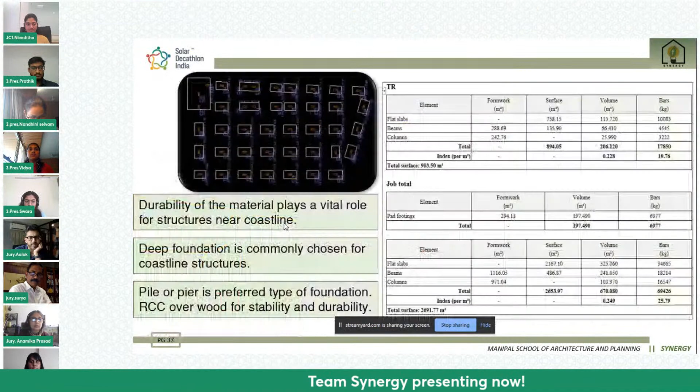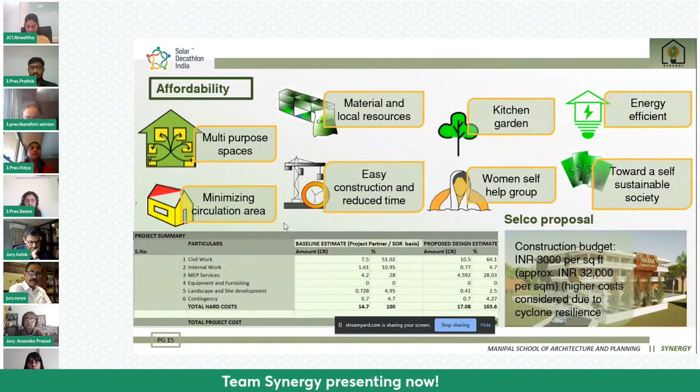Okay. And one last question. I don't want to hog all the time, but the self-shading bricks. I think self-shading as it relates to mass and volume of buildings in terms of the overall form of buildings definitely makes sense. But I'm just curious if you had done any analysis of the self-shading of the bricks itself. How it actually leads to benefit, and if so, what is that benefit?

Yes. The strategy that we have used for this self-shading is that we were not able to play much with the orientation of the building from 0 to 360 degrees. Our building itself is oriented from east to west, and we are supposed to achieve 100% of the ground coverage. We want to reduce the carbon footprint of the building, so the ground coverage was less, and we have increased the built-up. So the 1 meter projection of all the facades of the building also helped us with increasing the built-up of the building. And second, the floors themselves will be self-shaded. Okay. All right. Thanks.

Anamika, over to you.

Yeah, so congratulations for that excellent presentation. I appreciate your establishing the correlation with the sustainable development goals. I also enjoyed the way you walked us through the step-by-step analysis for energy. That has been a highlight, and I was able to follow the energy use reduction logically.

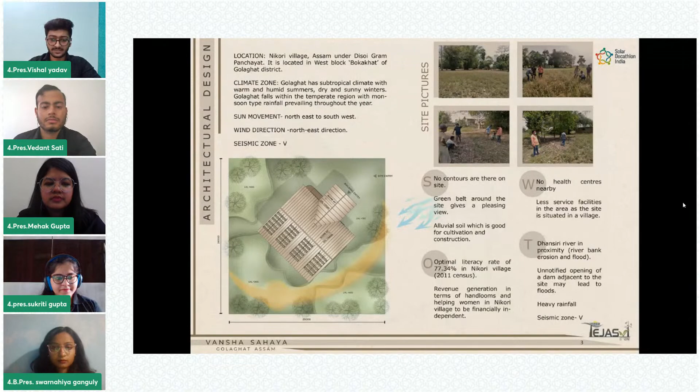Then, starting with the orientation and form development, it is done in consideration with the remote site analysis we did. The form is taken geometric to ensure optimum use of space, and every single square meter of site would be in service to the inhabitants. The facade is oriented 45 degrees to face the northeast direction with bamboo woven jali to ensure maximum daylight and natural ventilation to the inhabitants.

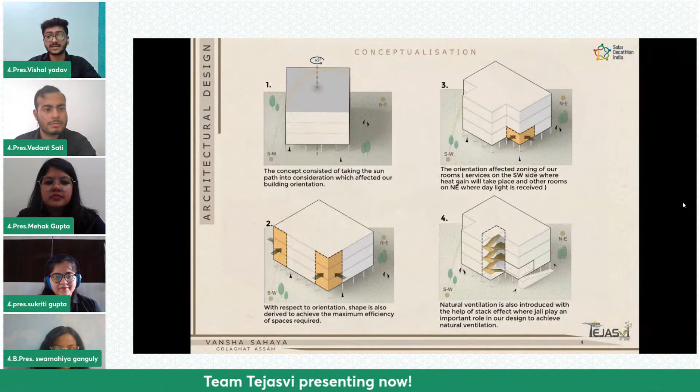And accordingly, the service core, namely toilets and staircase, is placed on the southwest side, exposed to maximum heat, with solar energy as the only possible renewable energy that we can utilize to meet the energy needs, considering the site context. Then, moving on to the area statement, the permissible built up at the site is 817 square meters, and we roughly exhausted the same by covering 810 square meters, ensuring 2 square meters per person, according to the Assam Notified Handbook for Disaster Management.

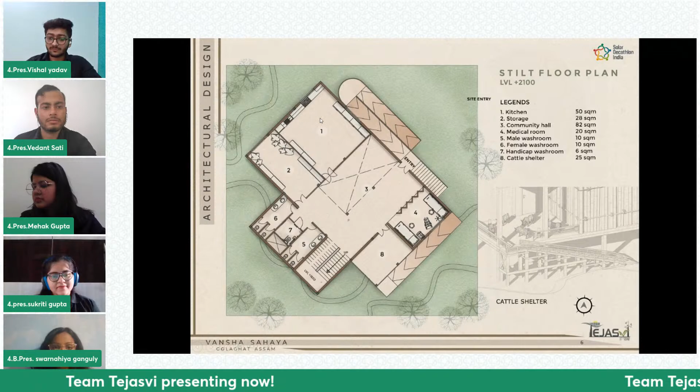So, the site requirements comprise a multi-purpose community space, a toilet with a soak pit, and a raised pump, considering the scale of the site, making this two-story structure capable to provide shelter to roughly 120 people at the time of disaster. The stilt floor plan over here is raised at a height of plus 2.1 meters with a provision of a specially abled ramp of slope 1 is to 12, which leads the people to this double heighted central gathering space marked with 3, plus a community kitchen marked with 1 is provided adjacent to a storage of food stocks.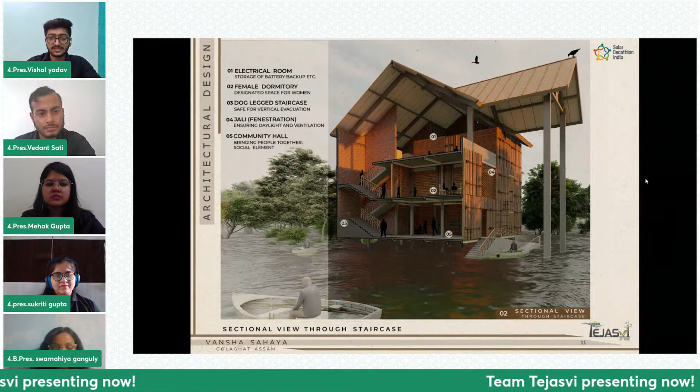Then the illustration over here shows the pre-disaster scenario in which the community hall is being used for panchayats and spreading information about government schemes. And the first floor is being used by local women as workspace to practice handicrafts, and also for them to promote and for revenue generation.

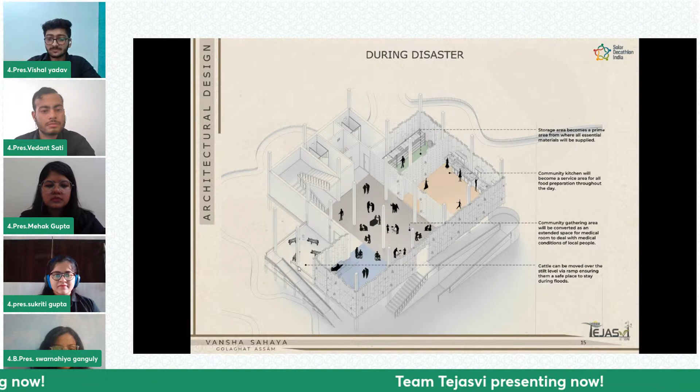Then during the disaster scenario, this illustration shows the double height is being fully used for medical purposes, and the safety of cattle is ensured by moving them onto the stilt level via that ramp, which is made of wood lumber, which is accessible from the stilt level as well. Then the first floor is dedicated to dorms for male and female, plus an IT cell marked with blue to maintain communication with nearby health facilities at the time of disaster.

Then coming to the resilience part of our building, in order to make the building resilient against flood, we have opted for the wet flood strategy, in which openings are provided below the sill level so that water moves freely in and out of the building, so that it doesn't exert too much force on the wall and the wall does not get disrupted.

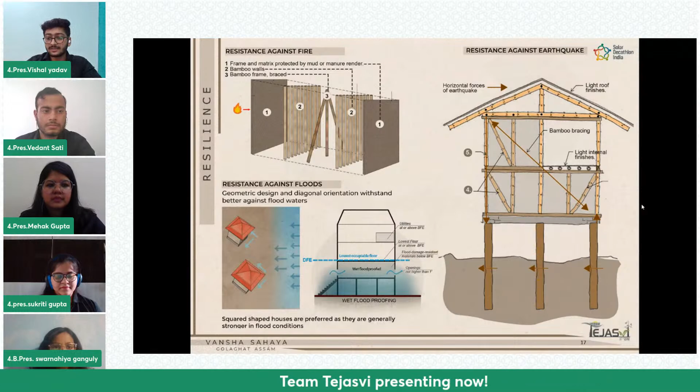And the skin of the structure is like a sandwich, in which bamboo bracing is in the middle and mud manure and cow dung layers are on either side. This promotes resistance against fire. Then for resistance against earthquake, we have provided bamboo bracing which will withstand the shear stresses of earthquake.

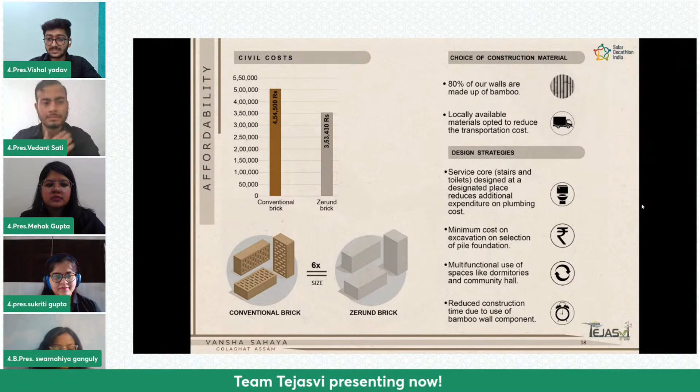Then, coming to the affordability part, under civil cost, we have used Zerund bricks, which are environmentally friendly bricks with a composition of plastic augments, and each is equivalent to 6 kiln bricks in size, and it is promoted by an indigenous startup of Assam, hence cost of transportation would be less. Then, following the vernacular architecture pattern and using bamboo and mud plaster on the envelope also contributes towards the cost efficiency.

Then the design strategies that we have opted, like the service core, is designed at a designated place, which reduces the additional expenditure on plumbing cost. Minimum cost on excavation on selection of pile footing. Then the multifunctional use of spaces like dormitories and community hall, and also the use of bamboo, as its installation is less time consuming, the cost of construction would be less ultimately.

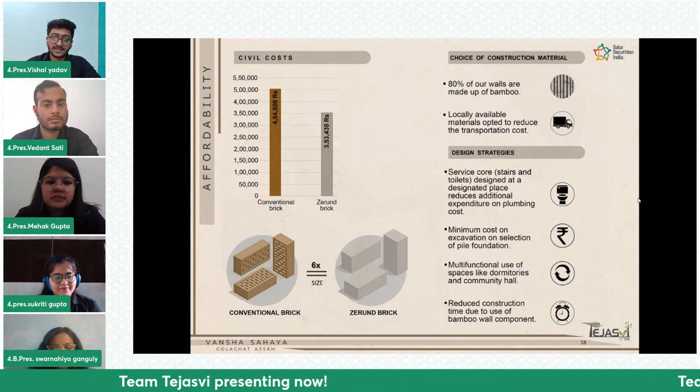So while discussing the energy performance, we will start by discussing the renewable energy generation. We have utilized the great potential of solar energy in the region to produce opportunities for the generation of renewable energy. The Golaghat region receives a solar irradiance of over 600 watts per meter square, thereby providing a great scope of renewable energy as solar energy.

Our building has achieved an EPI of 59 kilowatt hour per meter square. For a community resilient shelter without any HVAC systems, the optimum range of EPI values is between 56 to 65 kilowatt hour, and our value fits well within this range. We have set up a solar energy plant which has the capability of producing 4,000 kilowatt hour energy annually. Our annual energy consumption is around 3,700 kilowatt hour, and thus we are on a net energy positive margin by a value of 6.9%.

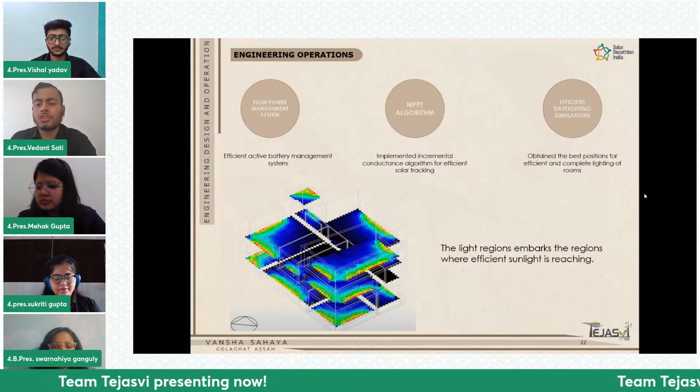We are also utilizing the active battery management system along with the MPPT guided solar panels, which ensures a proper storage of energy in the battery and very less energy is wasted while charging the entire battery.

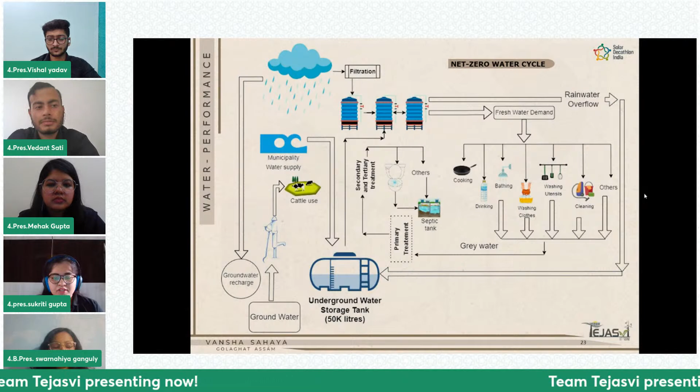Golaghat district of Assam is very much prone to recurring floods that not only bring devastation in the livelihood of common people but also make them deficient to access basic necessities such as clean drinking water. This challenge has inspired us as a team to think innovatively and to come up with ideas and solutions to ensure clean, safe, and sufficient drinking water for everyone. So, we are successful in achieving a net zero water positive cycle. Our representative diagram shows the same.

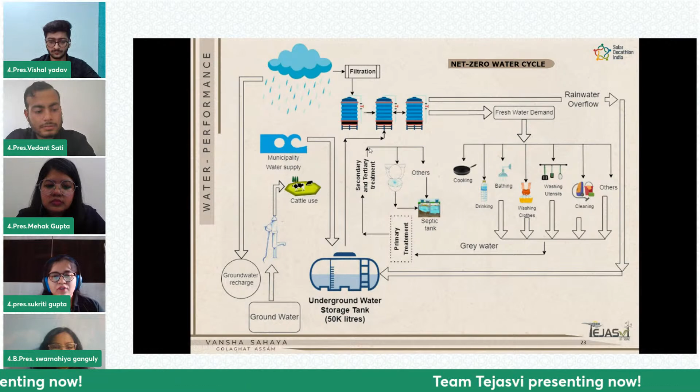So we are having rainwater harvesting and municipal water supply as our sources of fresh water supply on our site. We will be using fresh water for purposes like cooking, bathing, drinking, washing and cleaning, etc. The grey water generated from here will be sent to the treatment mechanism where it will be primary treated, then it will be sent to secondary and tertiary treatment, and then 70% of the treated grey water will be utilized for flushing demands. Black water generated from here will be sent to a septic tank before the discharge.

We are harnessing 498 kiloliters of rainwater annually and 630 kiloliters of grey water annually through our treatment systems. Since our shelter is a community resilience shelter, water consumption at non-disaster times will not be much.

So now coming towards the analysis part, our base case annual consumption is 135 LPCD and our efficient case annual consumption is 95 LPCD. We have been able to achieve this reduction by the use of efficient water fixtures like aerators and dual flush toilets. Here in graphical representation 1, we can also see the same, where we have represented our base case and efficient case annual consumption in liters. We can clearly see that the reduction is about 27%.

Also, from the pie chart, we can see that 52.8% of our primary demand would be fed by the treatment system, which will ultimately help us to reduce the dependence on municipal water supply.

So now coming towards the water treatment system. We are providing cost effective solutions that are highly efficient as well. For the treatment of grey water, we will be doing grey water treatment in three steps: first primary treatment, second secondary treatment, and third tertiary treatment. For primary and secondary treatment, we will be using tanks that will consist of a multimedia filter bed and an activated carbon filter bed. These filter beds generally consist of constituents like charcoal, silica sand, fine silica, pebbles, and gravel.

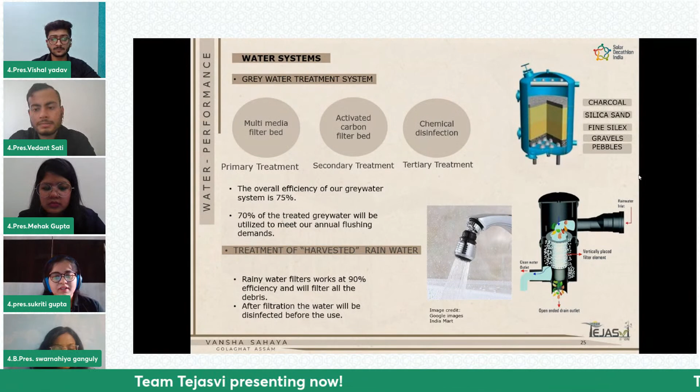Now for rainwater harvesting, we are doing rooftop rainwater harvesting. Water falling on the roof will be collected and filtered through the filters. We call them rainy water filters. Rainy water filters are a cost effective modern age technology which consumes zero power. It has a feature of automatically filtering out all the debris from the rainwater, and it is not only cost effective, it has an easy installation process and takes low maintenance as well.

So now talking about health and well-being, we ensure that every person living in our shelter maintains good health. That's why we have provided exterior jalis on the first floor as well as exterior windows to ensure good air ventilation in our building. We have limited the use of concrete material in our shelter and replaced 80% of the material with bamboo to ensure reduction in carbon emission. The treated rainwater and grey water is maintained under the safe pH limits.

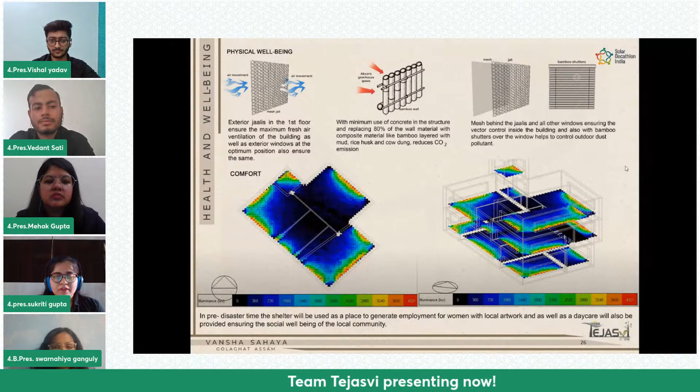We have provided separate male and female dormitories to ensure privacy of the people, and we have also done the comfort analysis of our building, from which we have analyzed that the optimum placement of the windows helps us keep our structure fully ventilated through cross ventilation. It also helps us in positioning of lighting fixtures.

In pre-disaster time, the shelter will be used as a place to generate employment for women with local artwork, as well as a daycare. Daycare will also be provided to ensure well-being of the social community.

To make it happen, our shelter collaborates with a few organizations like NEEDS, Swarnirbhya Nari, National Bamboo Mission and Atal Amrit Abhiyan. These are the organizations and campaigns which conduct awareness programs to increase market linkage, provide spaces to women to improve their standard of living, and can also enforce availability of bamboo. Sustainable development goals give the direction and help that each and every part is selectively catered to make the shelter eco-friendly. Now talking about innovations,

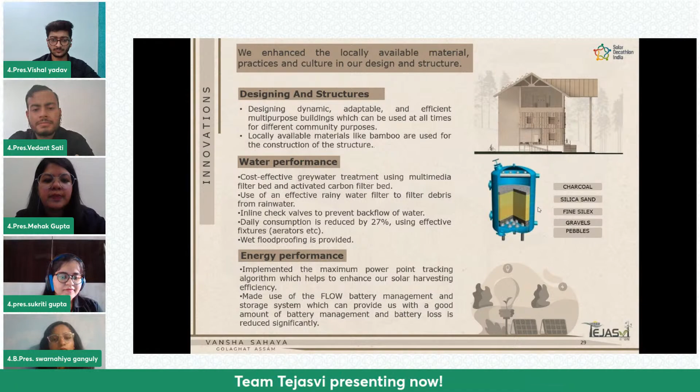Moving on to communication, we have promoted our project on different platforms with the help of different social networking sites like Instagram, WhatsApp, and LinkedIn. Most of our audience were youth and stakeholders. The opportunities that we generated were COP26, team meetings, innovations, and reels.

Now, we would like to give a vote of thanks to Solar Decathlon India for giving us this great opportunity and to Seeds India for providing us such an auspicious space for making this community resilient shelter. Thank you.

Thank you, team. That was a very insightful presentation. Now let's hear the jury comments and their questions. Yes. Aalok, can you start?

Yep. Yeah, so Vishal, Vedant, Mehak, Sukriti, very good work overall. I think that your design was among the most comprehensive in terms of addressing the different contexts of the competition. There's a lot to like in your design, and I do have one thought though.

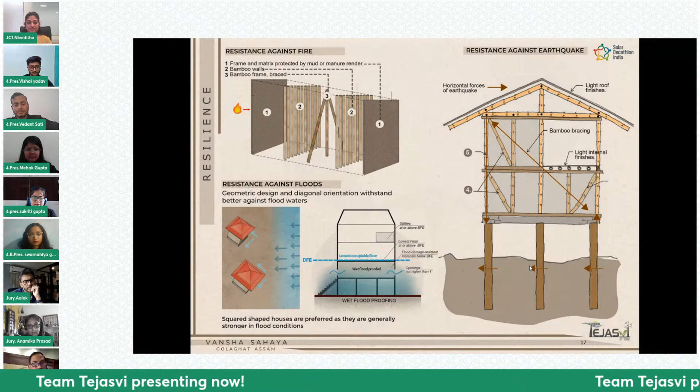Because there is a very interesting solution that has been tried in swampy, flood-prone areas, which is they drive down casuarina poles. They bang these casuarina poles one next to the other over a 1 meter square area into the swampy areas, and then over that they build a concrete footing, and then they put a building on top. When they built in swamp areas, this has worked very well. So I was just curious if you guys came across that.

So that's all right. Great job. Thank you, sir. Sir, I just want to add on the statement you said. We thought about the people there. We didn't think about this project just as a competition, but as a community shelter which can actually be made and be in use sometime in future, so that people there can definitely feel it as home, because many people lost their homes and lands during these hard times.

Totally agree with this. Just my little doubt. I actually think this is a better solution, having a more permanent, non-maintainable kind of surface over which you build what you've done. So in that sense, the hybridization is very good. Thank you, sir. All the best. Well done. Thanks a lot, sir.

Thank you, jury members, and thank you, Team Tejasvi. You've done a great job. So, folks, that was the last presentation in the Community Resilient Shelter Division. I want to thank the jury members for your thoughtful assessment and comments, and congratulate all the finalists. As the jury coordinator, I have seen these teams submit deliverables 1, 2, 3, and this final deliverable 4. They have collaborated and done integrated design while physically away from each other for 8 months. That deserves a very big round of applause.